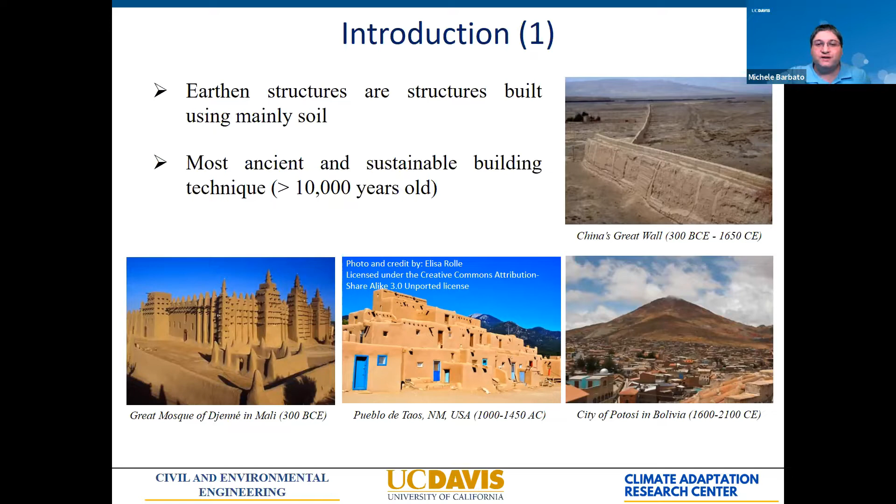Earthen construction is really one of the most ancient and sustainable building techniques used by humans to build houses. We have remains of construction made with soil that are more than 10,000 years old. Earthen structures are structures that are built using mainly soil as the base material. There are at least three different technologies of ancient earthen construction: cob, rammed earth, and adobe.

In cob, a mix of soil and fibrous organic material is mixed with water, and the soil produces walls by being layered to build earthen structures. In rammed earth, the same type of mix is compacted within forms using rams. And in adobe, bricks are made using the same composition and then letting the material harden and dry under the sun.

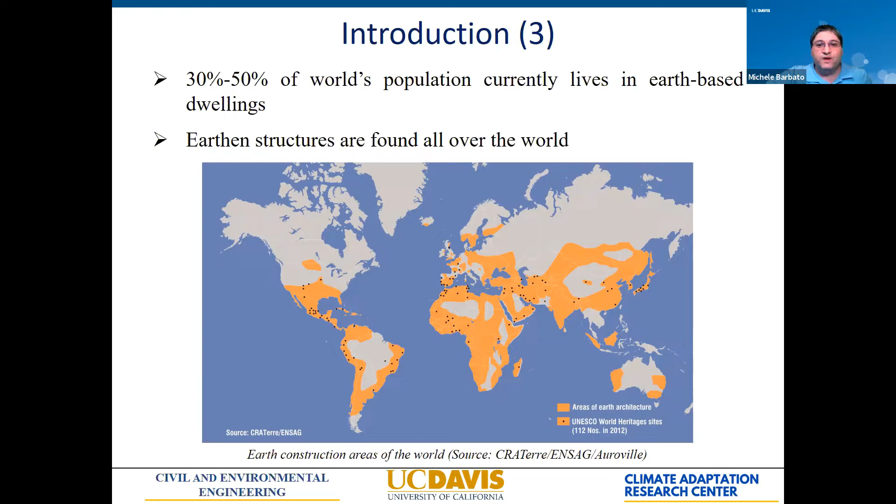In terms of the motivation for using and recovering this ancient technology, there is a practical motivation and one that is more engineeristic and intellectual. In terms of practical motivation, there is a need for affordable and sustainable housing. In the US, we have a shortage of almost 500,000 houses per year that need to be built in addition to the ones already built. We have accumulated a shortage of approximately 5 million houses; according to some calculations, this shortage may be even higher, up to 10 million. We also have a shortage of skilled labor in the construction industry.

We are also dependent on construction materials that are coming from other nations, or that at least are not local. We have seen what type of disruption in the industry this can create when there is a supply system that is collapsing, like we had during the COVID pandemic. There are also significant issues related to the energy consumption and pollution associated with buildings.

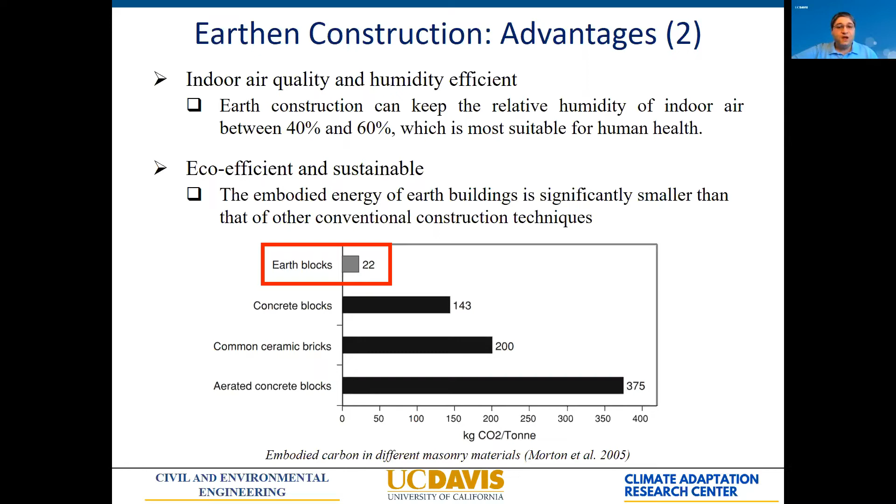Also, recent research has demonstrated that earthen construction can reach good hazard resistance to hurricane, tornado, and earthquake loads. That increases the possibility of applying this type of structure in different locations where ordinary masonry and ordinary earthen masonry may have been difficult to apply.

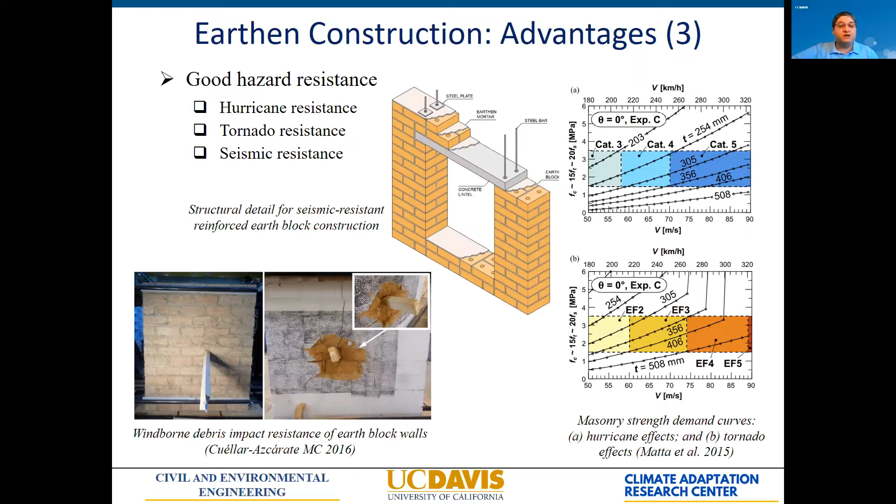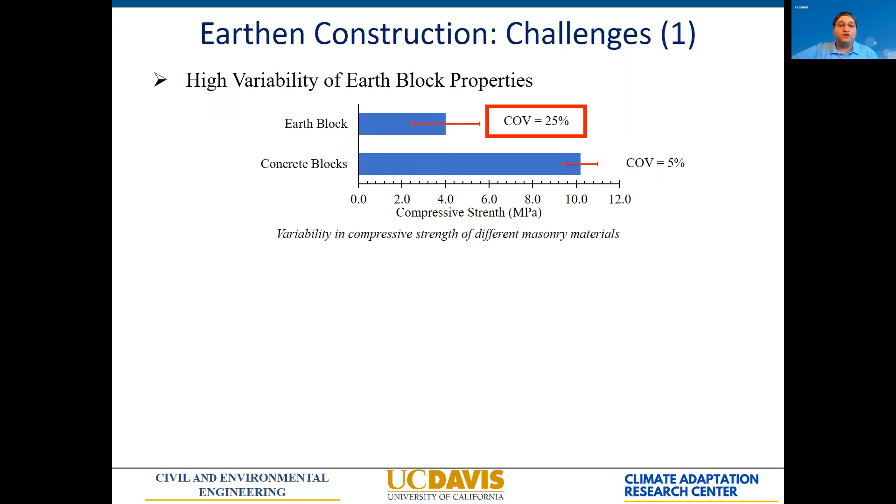There are also some challenges connected with this type of construction. The first is that soil is a natural material, thus it is affected by high variability in its properties. You can see here some results from our tests where the variability in the compressive strength of earth blocks is about 5 times larger than that of concrete blocks.

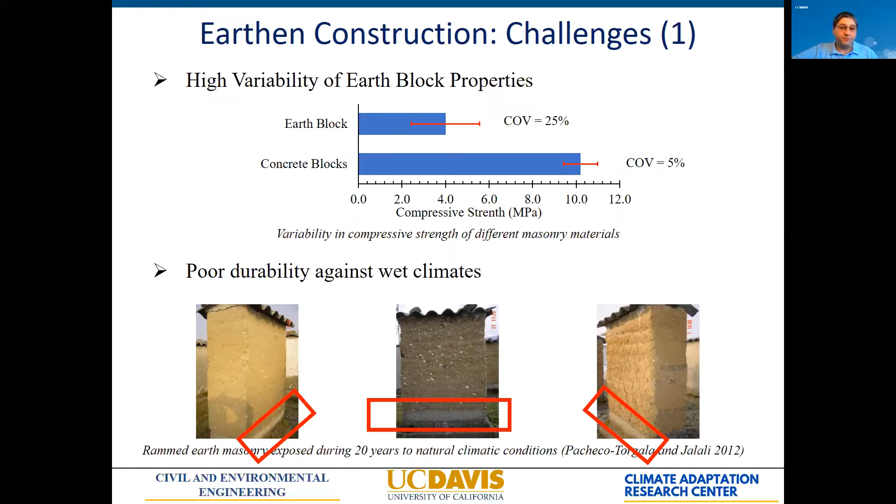Another technical problem is that the material is naturally brittle. Similar to concrete, it is very strong in compression, but whenever there is tension in the material, it reaches its peak strength quickly and then decays very rapidly, which, if done without attention, can produce problems, particularly in places with lateral loads like earthquake and wind loads. It also, in its typical historical form of mortared masonry, is labor intensive, which makes it particularly costly in places where labor is expensive or only available in limited supply.

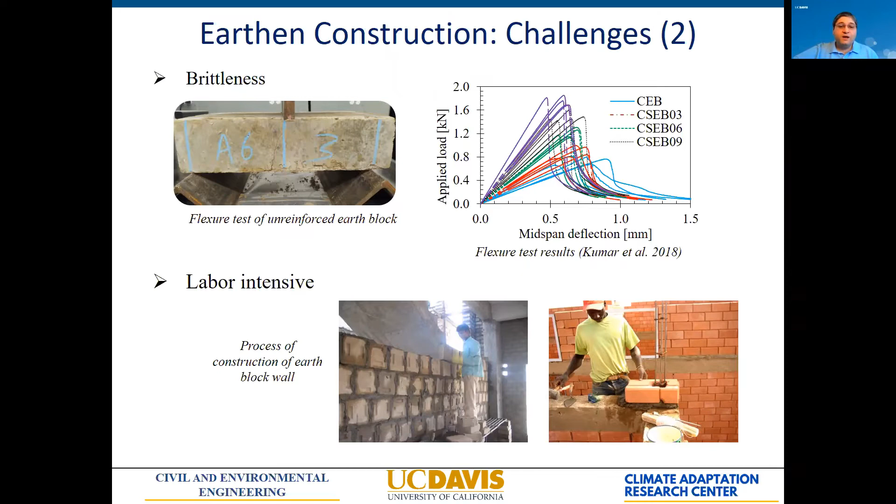There are also some less technical and more cultural problems connected with earthen construction. One is the lack of engineering-based design codes and standards. These are the latest codes introduced in the US for design of this type of structure: the New Mexico Administrative Code, the International Building Code, and the International Residential Code. These are all very recent and related to empirical or prescriptive design, which usually provides designs that are not necessarily the most efficient.

There is also a need for more education among engineers, architects, builders, insurers, lenders, local building officials, and in general all stakeholders connected with developing this type of structure and building it in the real world. But probably the most difficult one to fight is the widespread perception that earthen construction is a substandard choice.

This is really connected to the poor performance of earthen structures in other places in the world, where the structures have not been engineered and thus have performed poorly under earthquake loads, but also under hurricane loads. However, this is really a misconception, because even if you were using other modern materials without engineering principles for their design, they would perform very poorly under the same conditions.

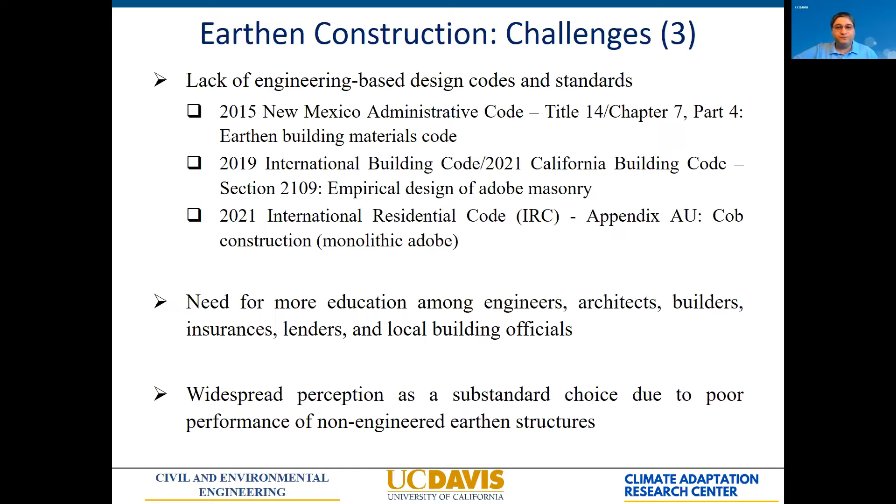So, notwithstanding all of these issues, modern and engineered earthen structures have been built and are being built in the world. There are just some examples: in Europe, Germany, Austria, Switzerland, in Africa, in Asia, in the United States, in New Zealand, in Australia. So it's not true that this material is not being used, but definitely it's not being used to its full potential.

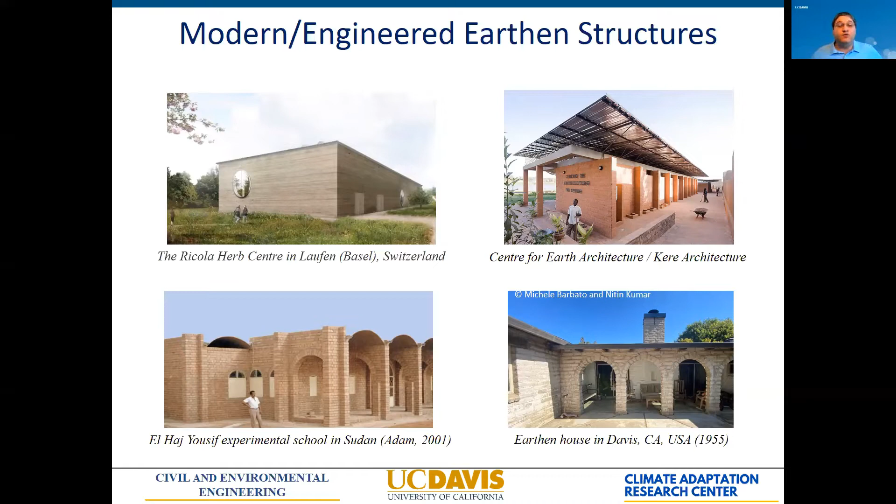So going back now to earth block construction, there are three types of earth blocks that are generally used.

There are compressed earth blocks, where the soil is compressed mechanically to increase the strength. There are stabilized earth blocks, where the soil is mixed with a chemical stabilizer, generally cement or lime. These also increase strength, but also particularly the durability of the blocks. And then there are compressed and stabilized blocks, which are a combination of the compression from CEB and the stabilization, in which the soil is mixed with the chemical stabilizer and then is also compressed. These blocks generally can achieve higher strength and better durability than all other blocks.

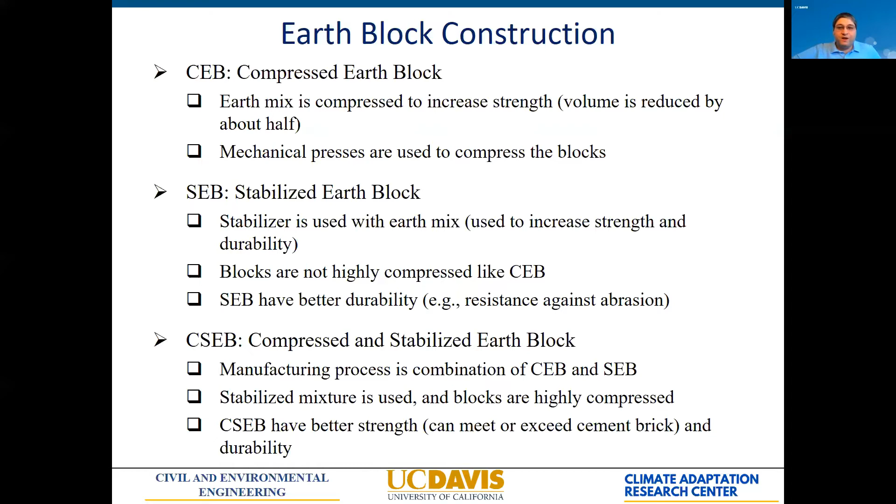As an example, this is our fabrication of earth blocks that can be built with very different types of shapes. This is a group of our students making blocks using a manual Cinva ram that we built in our lab. We have more recently bought an Auram 4000S hydraulic machine that allows us to mechanize most of the operation that now we are doing manually with our Cinva ram.

As you can see, that's how the nice block comes out, but with the appropriate molds, we can provide the different shapes that are shown here.

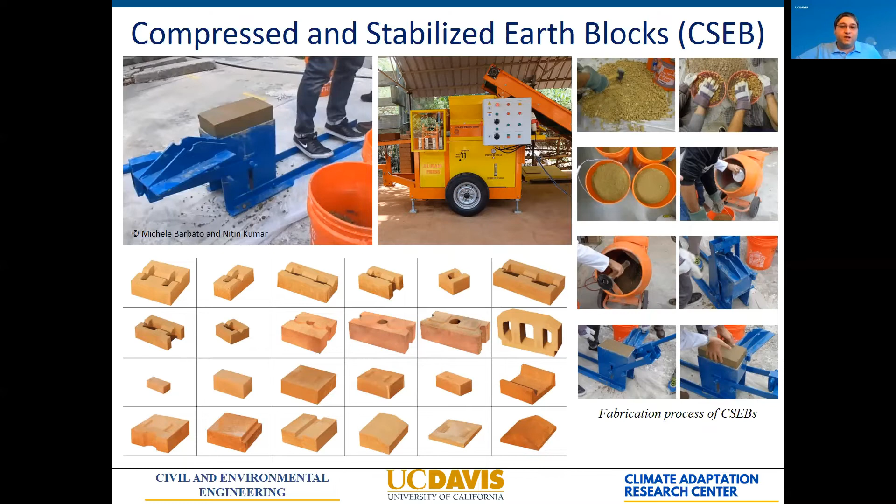With this in mind, we started our work by investigating the feasibility of CSEB houses, focusing on the US Gulf Coast, and particularly Louisiana, where there is a very high need for low-income households and affordable housing. There are several challenges there, so that made the research particularly interesting. The quality of the soil is considered generally poor for earthen construction. The climate is hot and wet, and there are high wind loads from hurricanes. And we need to really bring down the cost, because ideally we are trying to provide stable housing for people that are in trailer homes or that cannot really afford anything.

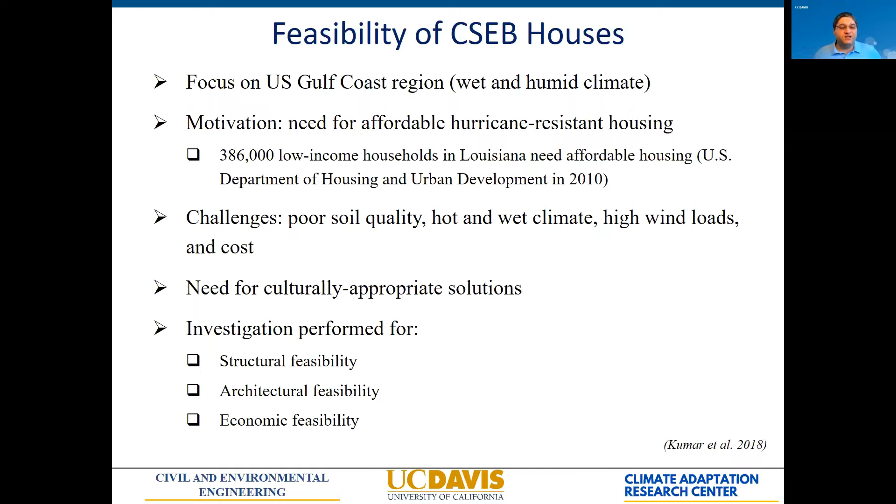We also need to have solutions that are culturally appropriate. We cannot introduce in a location a type of construction that is completely different from what is used there, because that would encounter some resistance in terms of acceptance from the public. So we investigated the structural feasibility, the architectural feasibility, and the economic feasibility of earthen constructions, trying also to address all of the issues and the challenges that I discussed before.

We started with investigating the local soil. This is a soil that was collected around the Louisiana State University campus in Baton Rouge. As you can see, it is mostly outside of the optimal range of composition between silt, clay, and sand for earthen construction. So the need for some stabilization was clear.

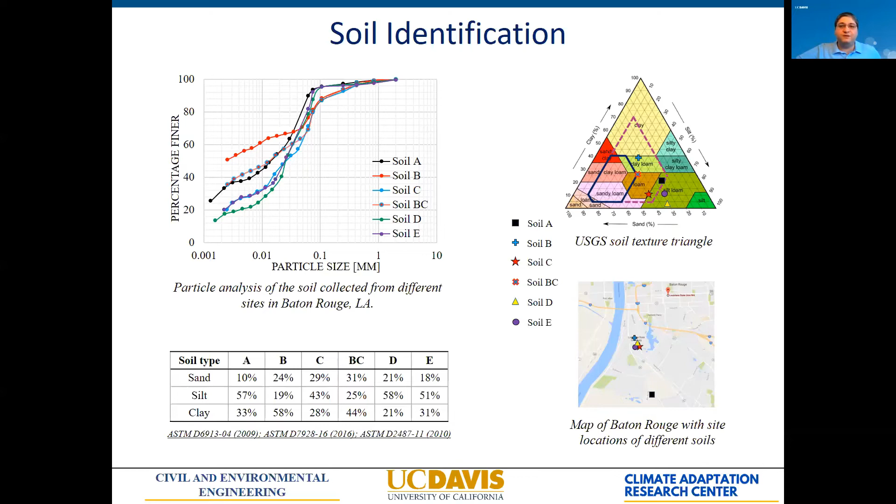These are all of the different soils that we have used, with which we started building and fabricating our blocks. We investigated the compressive strength, the flexural strength, and all of the different properties with rigorous testing in our lab. We found that in terms of compressive strength, we are able to achieve enough strength already with 6% cement.

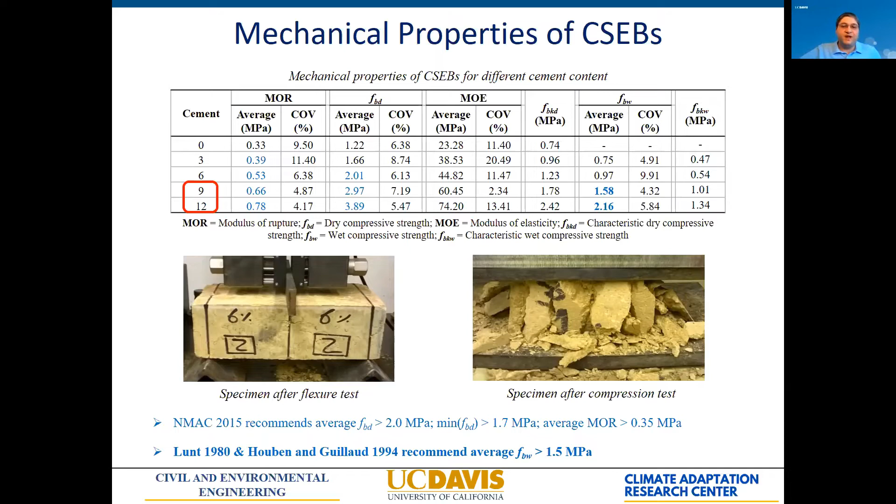And then when we investigated the durability and the performance under wet conditions, we needed to have a little bit more cement, so that at the end our solutions included 9% and 12% cement. These are relatively high values of cement, and that is really because the soil available locally was not optimal for the type of construction that we were considering. But even under that condition, we could still achieve appropriate compressive strength for our material.

Then we wanted to work on our brittleness and the flexural strength. So we used another locally available material, in particular sugarcane bagasse fibers, which are a byproduct of the sugarcane production. There are more than 9 million metric tons of fibers that are produced each year in Louisiana, Texas, and Florida mainly. About half of this material is burned to produce the electricity that is used inside the sugarcane mills. And then the other half of this material is really stockpiled and is actually a fire hazard that needs to be dealt with.

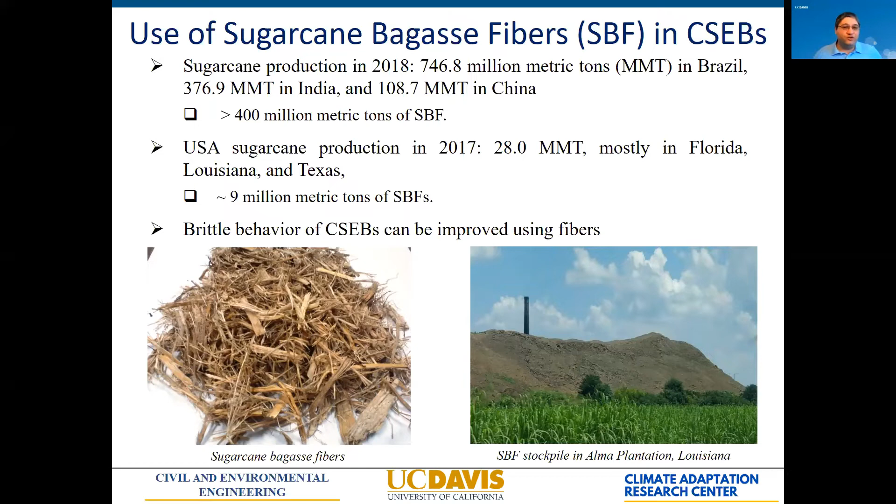So we were achieving really two things at once: improving our material and also finding a beneficial use for a waste material.

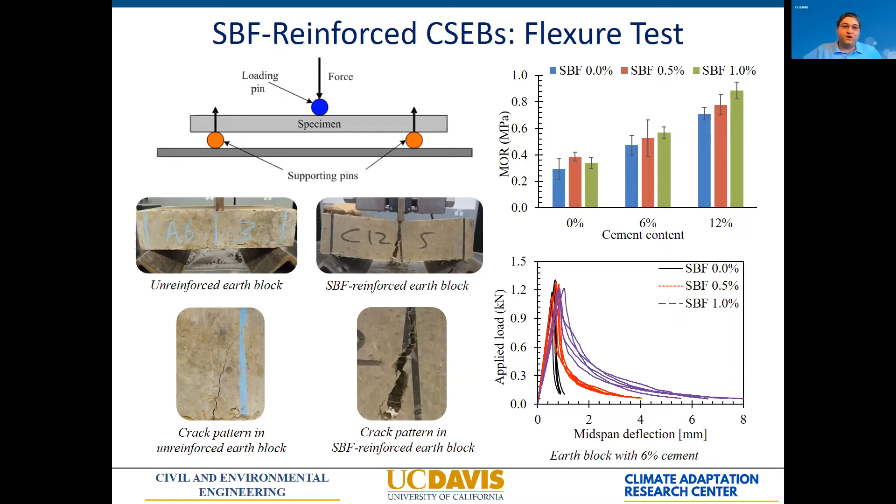We investigated this performance. I'm not going to describe everything in detail, but by doing flexural tests on the bricks, we found that indeed we could not only increase the strength of the material, but in particular we were improving the ductility of the material, which is critical to ensure safety of the structure. This is evident both in the flexure test and in the compression test that we performed, where you can see how adding more sugarcane bagasse fiber has smoothed out the performance of the blocks.

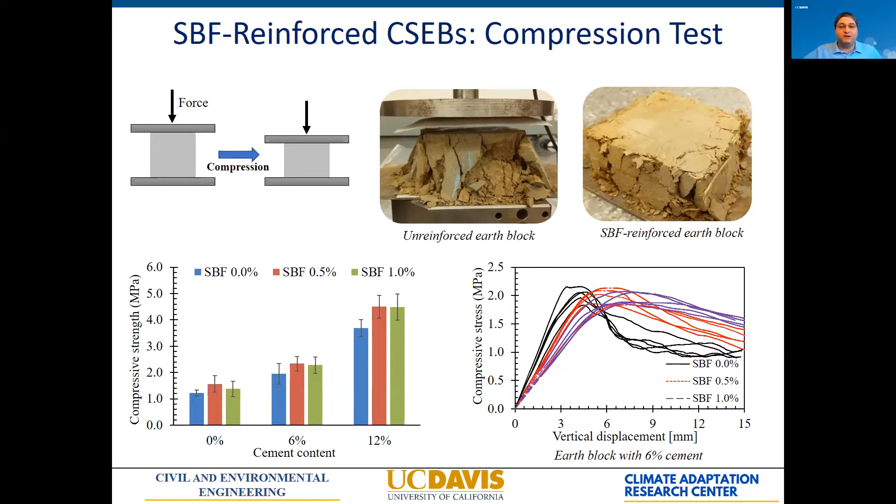We needed to be careful in the amount of fibers that are added to the material, because while we are increasing on one side the compressive strength and the ductility, we are also reducing the durability, which we tested with the wetting and drying durability test cycles.

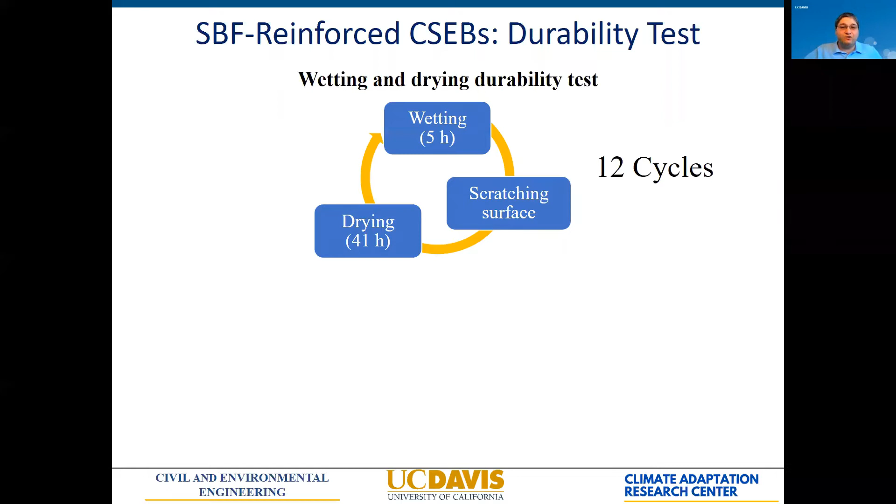We found that there is actually a relationship between the amount of cement and the amount of sugarcane fiber that can be used to improve at the same time the durability, to have a proper durability, and improve the mechanical properties.

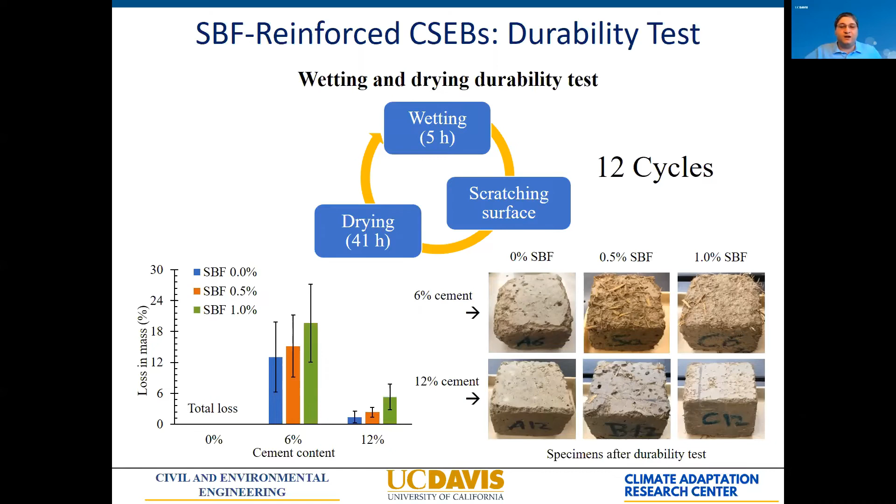The next step was investigating the durability of this material in a weather like the one of southern Louisiana. So what we did was we built a small masonry wall and tested it by leaving it for 6 months outside in Baton Rouge. During that period, we had 2 strong tropical storms pass through the town, so it was actually a pretty severe test for the wall.

Once the mortar is removed, you can see that the masonry is damaged, the block is damaged and broken. However, on the side that is protected, we didn't find any damage.

Even more, when we dismantled the wall, we tested the bricks that were visually intact, and we found that the side that was protected kept increasing in strength, because the cement inside the soil continued hydrating while subjected to the water coming down on the wall. So in terms of durability, we found a way to make this material very durable, even in a hot and wet climate like southern Louisiana.

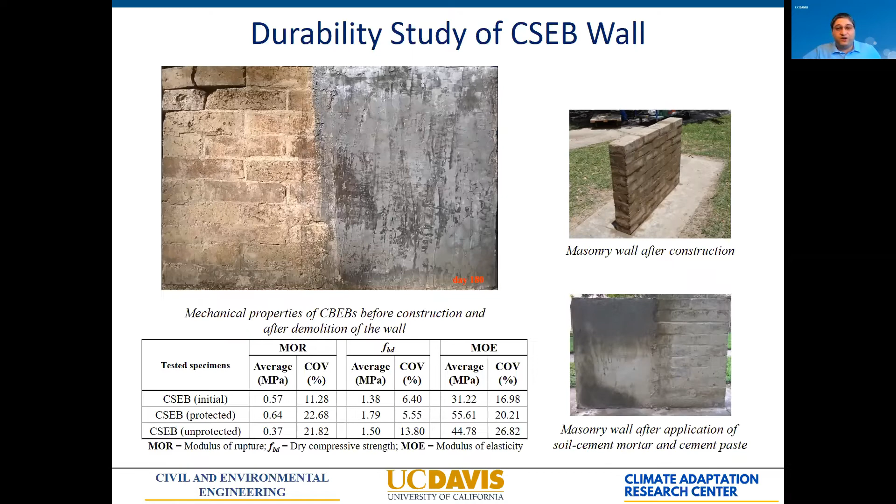We then investigated the strength to hurricane winds. I'm not going to describe this too much in detail, but this figure reports the curves corresponding to different thicknesses of the walls, so that on the horizontal axis you can read the design wind speed in meters per second at different locations, taken from ASCE 7.

On the vertical axis, you have the characteristic strength of the masonry, with the two horizontal lines corresponding to the strengths of the blocks with 9% cement and the blocks with 12% cement. When you find the intersection between one of these curves and the vertical line, as long as they are below the level given by the horizontal line, that is an optimal design for that type of structure. What we found is that we can build walls that can take even Category 5 hurricanes in this place that is subject to very strong wind loads.

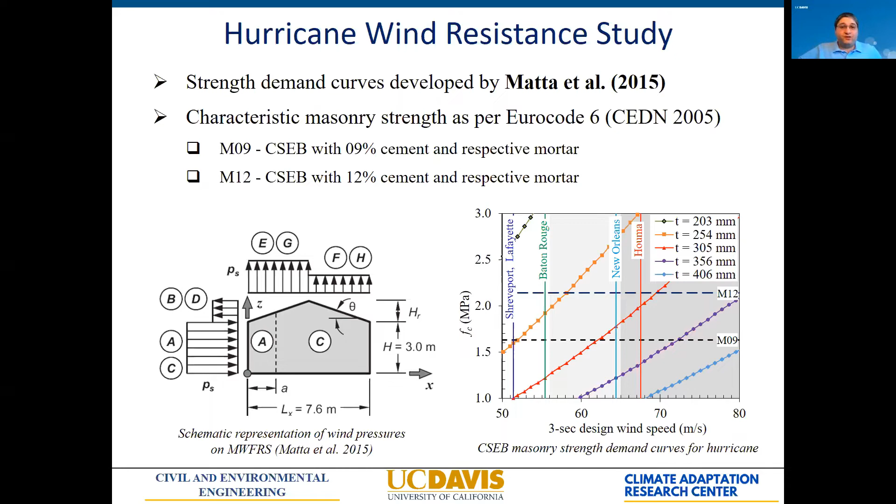The next step is finding if this construction is now economically feasible. We compared different types of construction: concrete blocks, fired bricks, light frame wood construction, which is obviously the dominant type of construction, clear from the fact that it's also the cheapest. We investigated the original mortared earthen construction, and found that the labor cost for this type of construction, when mortared, is quite high, which is obviously not a point of advantage.

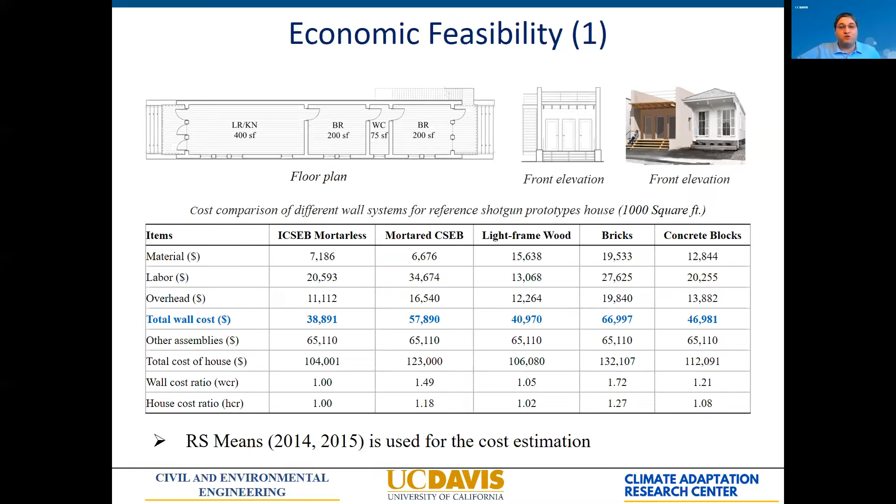Just to explain briefly what we are doing: we are using interlocking blocks with grooves and protruding elements, with reinforcement that helps in positioning the different blocks and also provides additional strength. With this configuration, we were able to reduce by a factor of 2 the amount of labor needed for this construction, as you can see here.

And that's all you really need in order to make it cost competitive with wooden housing.

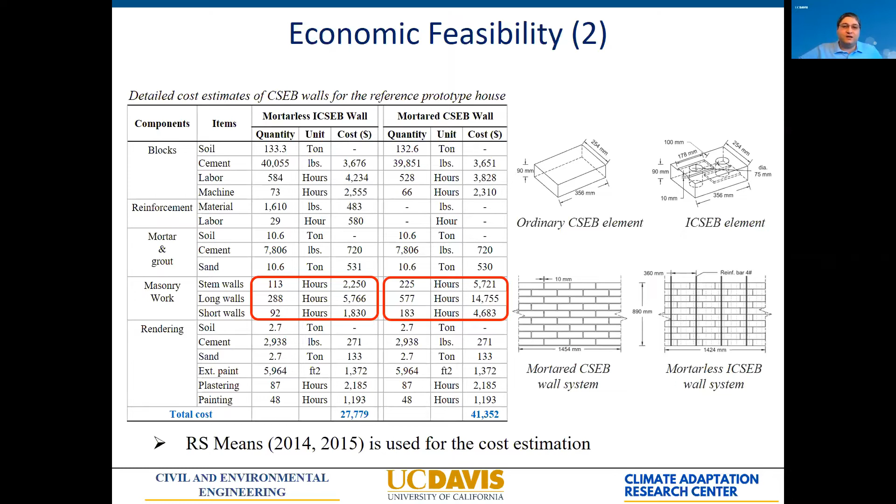Given that, we started also investigating the performance of this construction for other problems that are typical of California, but really we should say typical of most of the western coast of the United States, from California down to southern Texas, and that's wildfires. On this one, I'll focus mostly on California, but it's a much wider problem than just California.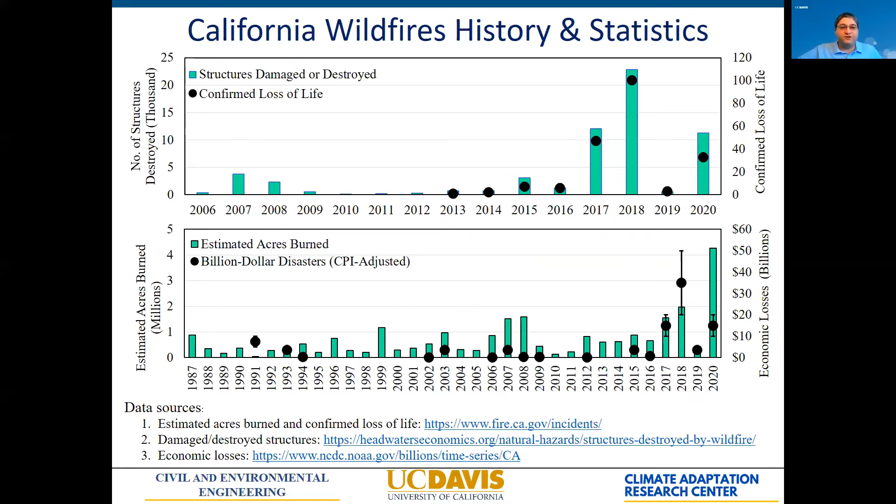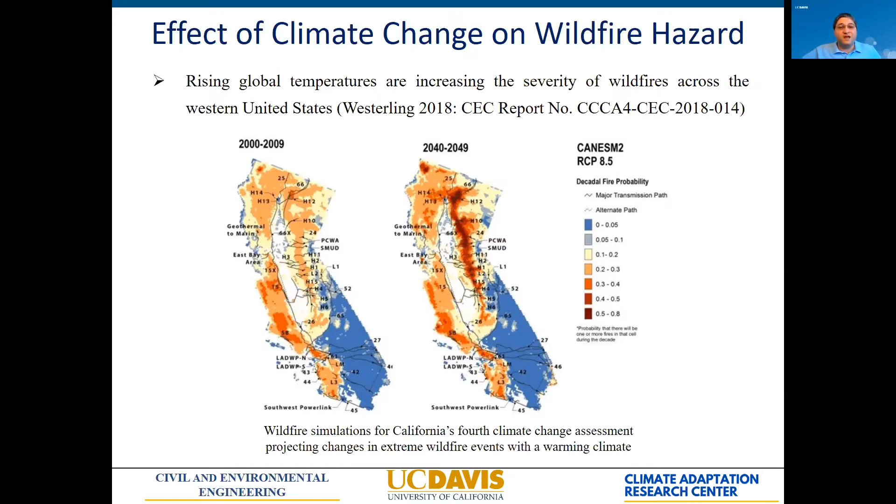So what is the reason for that? There are really two reasons. One is that climate change is increasing the wildfire hazard, making things worse and worse. We expect that to continue for at least 20 to 30 years before we see an inversion, assuming we do something about climate change. There's also another problem: our vulnerability is increasing because we are building more and more in the wildland-urban interface, where wildfire risk is most severe. So our risk is really exploding because both hazard and vulnerability are increasing at the same time.

In California, we have the California Building Code with Chapter 7A, dedicated to the problem of building in the wildland-urban interface because this is a serious problem. I won't go into all the details of the fire resistant test standards and requirements for exterior protection and defensible space, but fundamentally what Chapter 7A is doing is trying to build houses that are ignition resistant—meaning once the fire reaches them, they don't start burning easily, hoping the fire will pass over the house without burning it down.

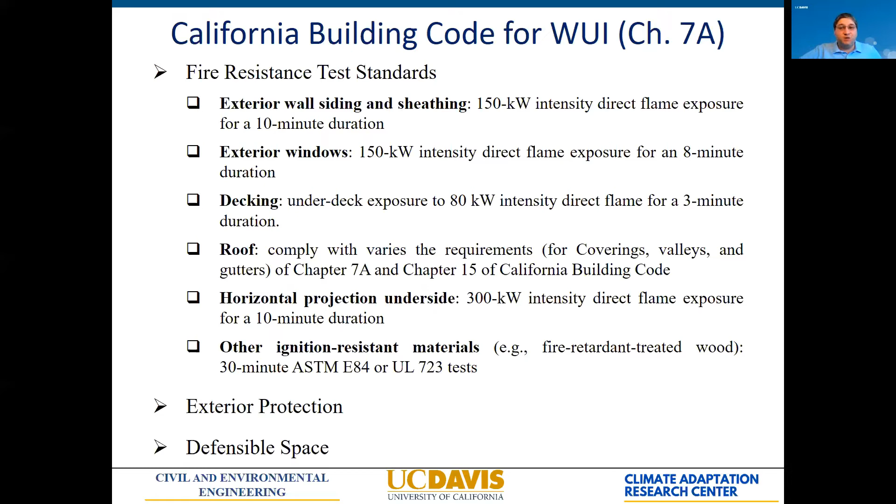And this is because there is a widespread understanding that fire-resistant buildings are too expensive to be feasible. Our research is actually trying to go beyond that preconception and demonstrate that we can build fire-resistant buildings using earthen blocks that are also economically feasible.

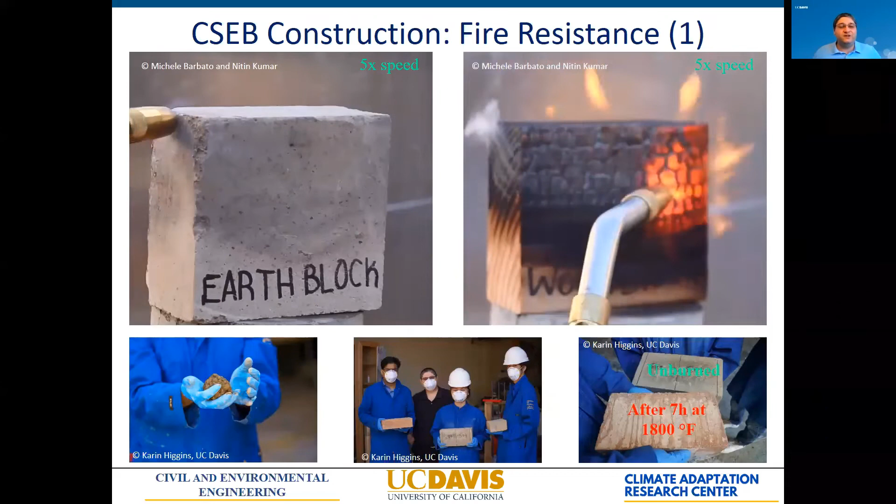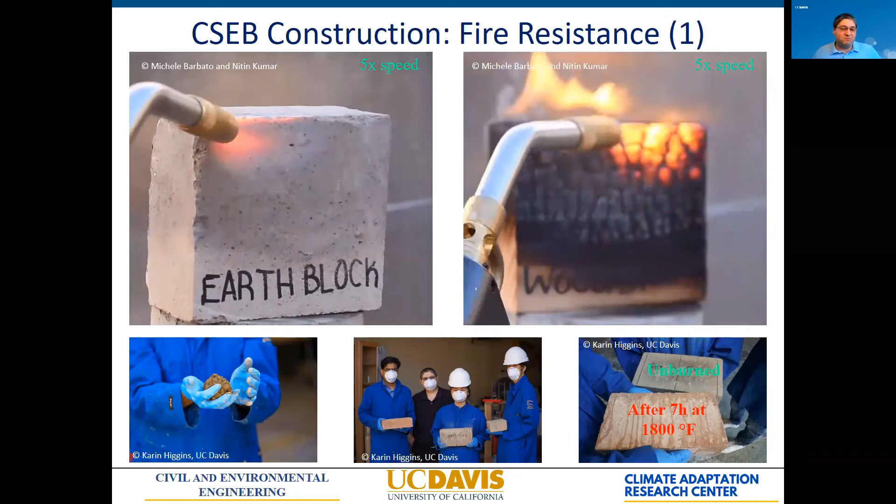So we are investigating the performance of earthen blocks, just as an example of what happens when you subject wood and earthen blocks to fire. In this case, this is a propane torch at 3400 Fahrenheit. The wood is immediately charred, while our earth block shows just a little change of color, but nothing much happening. We are testing these materials in the furnace, and we found that even after 7 hours at 1800 Fahrenheit—much more than the requirements for non-combustible material—our blocks are still practically undamaged.

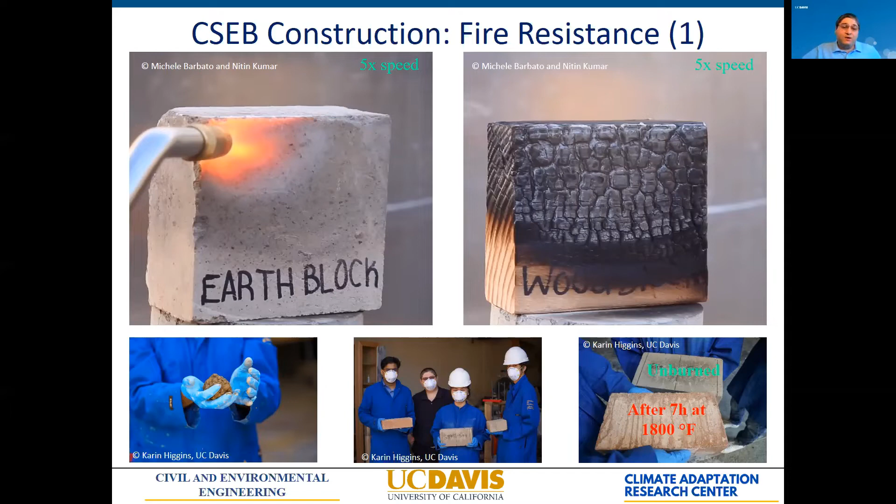We are doing more detailed testing. I don't have all the results ready yet, so I'm not presenting them, but we are testing the material at different temperatures to see how they respond mechanically and the effect of fire. Our preliminary results show that up to a certain point, the mechanical properties of the material actually improve, because what you're getting is fundamentally fired bricks—so they are even stronger than the originally unburned bricks.

We are doing all of this different testing, and we're also investigating how to integrate other fire hardening systems like roofs, covers, vents, and defensible space, so that you really obtain a house that is fire resistant.

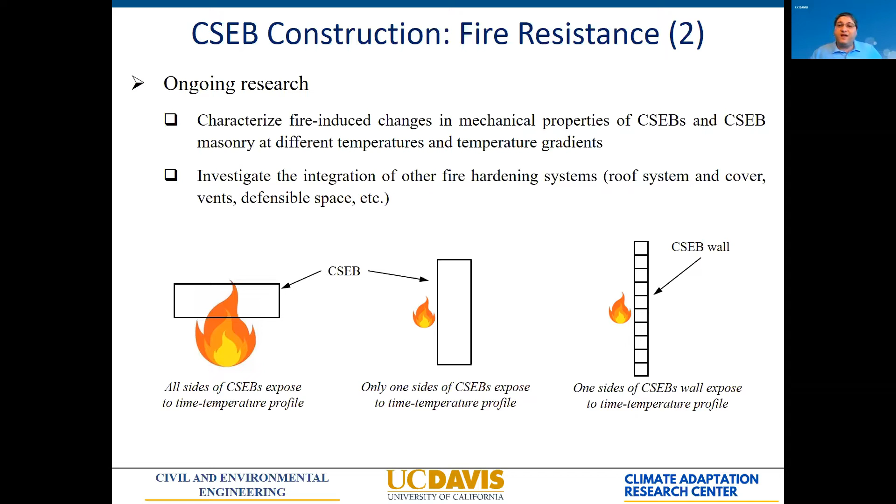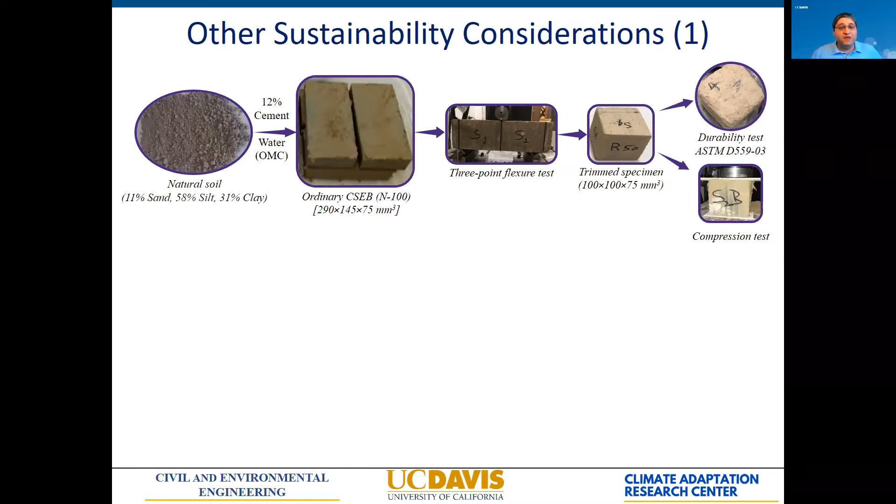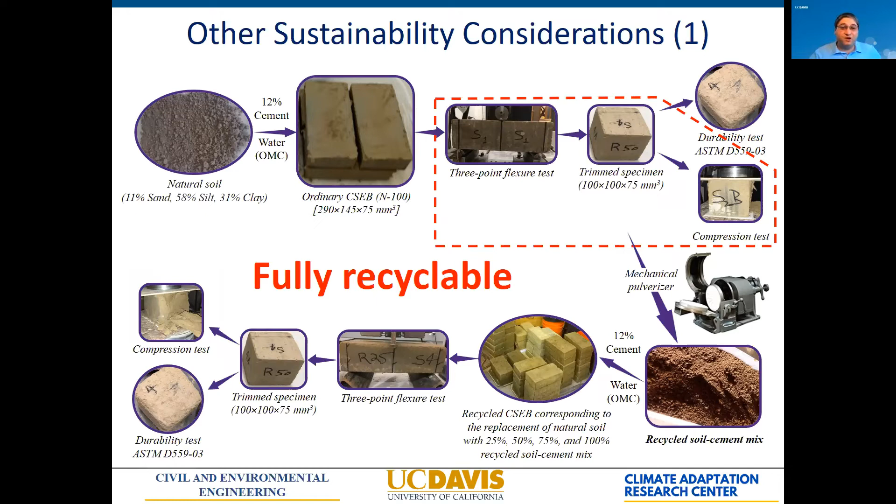We are also investigating other sustainability considerations. For example, we've done an investigation on recycling the material used for CSEBs. I won't go too much into the details, but what we found is that we can reuse the material from damaged bricks to build new bricks that are as good, if not even better, than the original bricks. So the material is fully recyclable, which is very important in terms of sustainability.

Another ongoing study is the investigation of embodied energy. What we found from the literature is that generally earth block houses and light frame wooden houses have very similar embodied energy from construction. But these studies usually neglect the fact that wooden houses burn. When you include the effect of wooden houses burning from wildfires, you find that light frame wooden houses are not very different from concrete block houses, and are much worse than earth block houses.

Also, in terms of operational energy consumption, you can get very significant savings using earthen construction—between 30 and 70%, depending on the climate. Another advantage that's often not considered is that the design service life of these houses can be much longer than that of other houses. There are examples of houses that easily last 100 years, while current wooden houses have a theoretical design life of 50 years, but an effective design life of about 35 years.

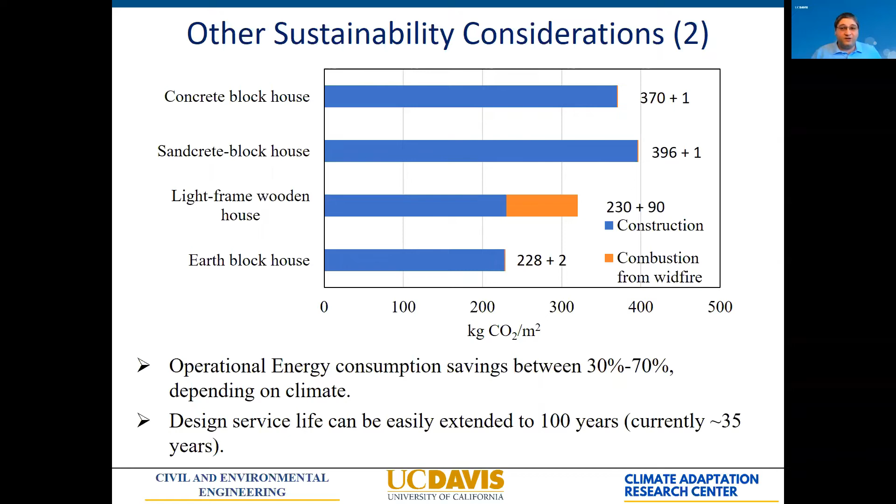I'd like to acknowledge some of the ongoing initiatives using CSEB construction for the greater good: the Good Earth Lodge between the Crow tribe and the US Department of Housing and Urban Development to provide housing in the Crow Nation territory, and the Brick by Brick program of the Human Services of the City of Scottsdale in Arizona, which works with volunteers to build houses for homeless people.